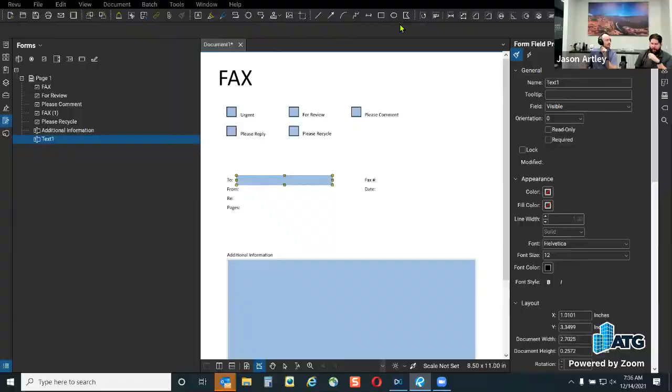Question here from Rob: they've shifted over 100% to Bluebeam from Acrobat. Everything's great, except for fill and sign on Adobe, which is really good for signing contracts. I know how to sign docs with Bluebeam with a password, but is there a similar fill and sign function? Because it's really slick on Acrobat.

So the question back to you, Rob, is what version of Revu do you have? Because if you have Revu Extreme, you can do more fill-sign stuff across multiple documents at the same time. I'm guessing Adobe works almost like DocuSign, where you click it and it drops you down to the next signature area. Is that what he's talking about?

Maybe, that's pretty slick. Yeah, because that's slick, I do like that. I know DocuSign has that. Revu doesn't have anything like that so far. What Revu does have is batch sign and seal, which is signing and sealing in the same location.

We actually did that last week. It looks like someone put that in the chat. Yeah, 20 Extreme. Okay, so what you could do -- it's not going to let you if there's already a place for you to sign and they placed that signature, this isn't going to help you that much.

But what this will help you with is if you don't have a signature, just a line where you're supposed to sign, great, because this will help you with that. If you already have the signed spots in place, this isn't going to help you because you're going to have to go through and click anyways, since Revu encrypts per page.

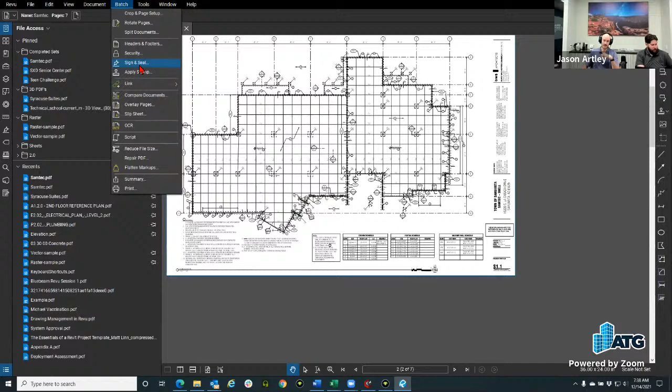What I'm going to do is go to batch, and from batch go to sign and seal. If you have Revu Extreme, because this is a Revu Extreme feature only, this is what you're going to go through and do. From here I'm going to try a different thing from signatures.

I'm wondering if you could click through and do it for signatures the other way. So from here we're going to do batch, sign, and seal. I'm going to hit next. You're going to be brought to this window, which will allow you to apply digital signatures here.

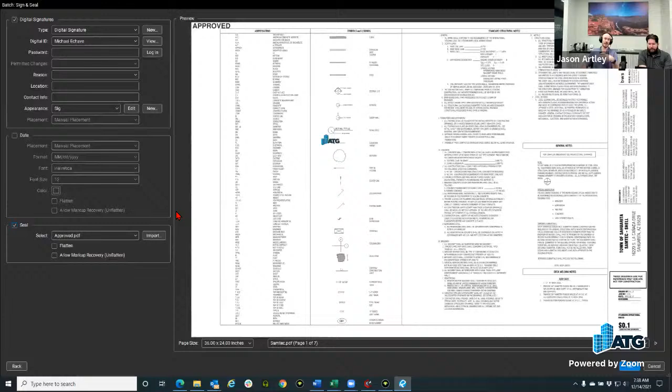This is going to be your sign-in signature, whatever you have. I have my signed signature here, which is just my ATG logo. And then I'm going to have my seal here -- you may not be providing the seal, you may be providing just the signature. So if you just wanted the signature in the same spot on the PDF, same location, this is what you're going to do.

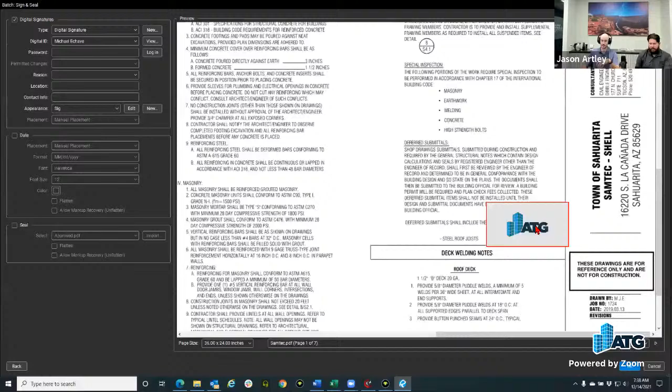Now, my other thought was, what happens if there are signature locations? So hold on, let me go to tools, apply signature location here. And then do -- so that's now a place. Let me go to the next page and add a new place to sign.

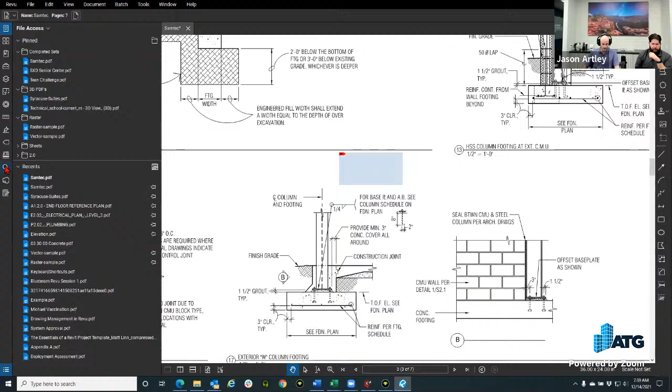Because what you'll have is, now from here, if I go to signatures -- it's not even showing the boxes in here. I guess it's only when you sign it. So maybe under forms -- where's my forms tab?

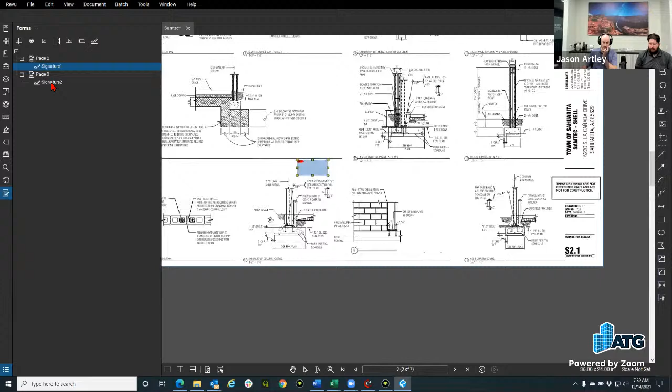So you can go to here and click on them, but it's not going to automatically sign all of them at once. And I think that's kind of where you're going with that.

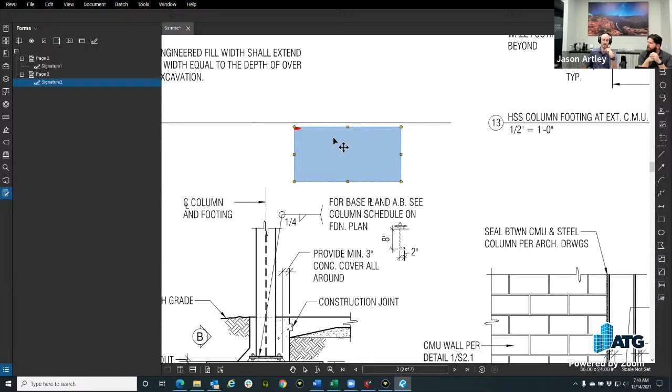So option A: delete the signature fields and then do the batch sign and seal, right? Or add hyperlinks to jump you to the next spot. Or flags. Or you can click these too from your forms -- that's a great way to do it.

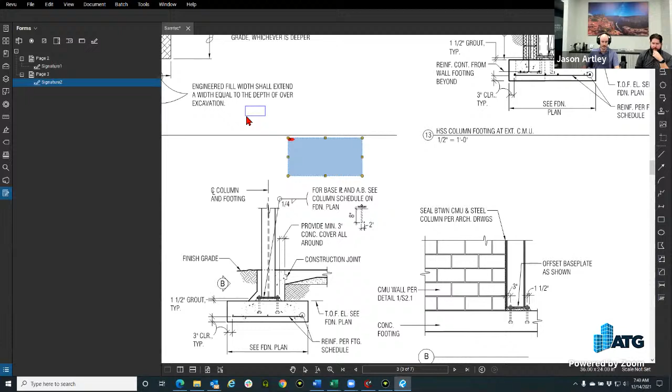But I think specific versions don't have the forms panel, if I'm correct. Yours being Extreme will. We have Extreme and you get the forms panel. This lets you click to each one and then sign them. Then you can come into here and just click, select, sign. You've already signed in, you get to sign it. But it's encrypting them per page.

Okay. Hopefully that answers your question. Interesting, good question.

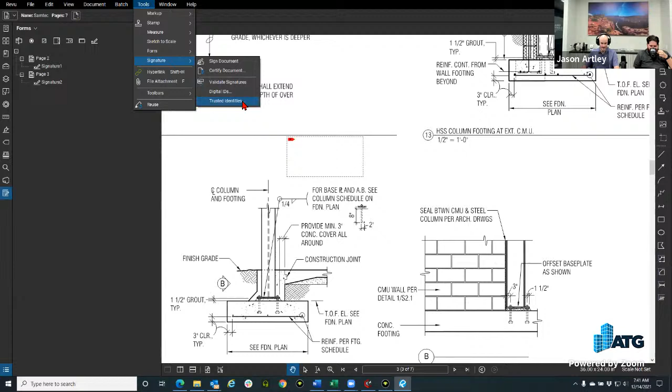So with that... unless, oh, are we going down the rabbit hole? You know I love to do it. I'm looking, there isn't any sign of it here. So yeah, okay, that'd be cool. Right, Doug? I'm glad some of you like going down the rabbit hole with us, because it's always fun, right? That's how we figure things out, and it's always fun with a sounding board.

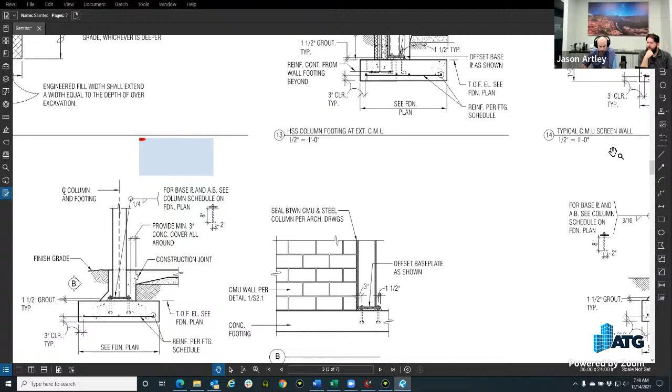Now, down here in the markups list, you have the ability to, like Jason was mentioning earlier, reorganize your columns, right? So as we go through and look at all of our columns here, I have some columns created already. And ironically enough, I have a formula-based column here.

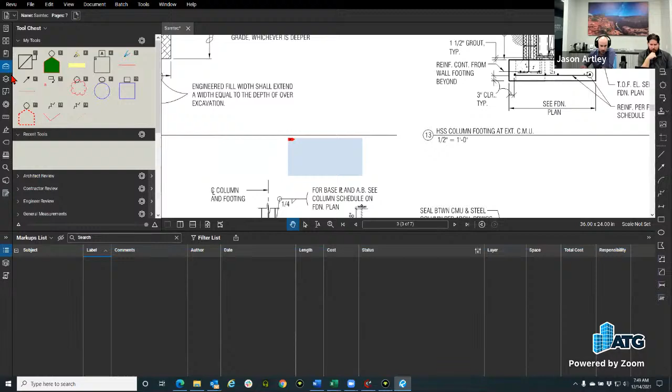So when I go through and make a markup, I'm going to grab a tool chest. Now, this was specific to an electrical design set that I had and was talking with the client. Yes, this is a structural design set, but what I'm going to do is place a line volt here that is a 120 volt.

It is a measurement feature here. I'm going to hold shift. It's actually a poly length. I need to apply a scale, and this is 3/32nds.

Now what I'm having here is some data being populated. So already with this custom markup, it's on a layer. I like having custom tool sets on a layer so that I can turn specific markups off that are set to a tool set. Number two, I have a cost value already associated to the markup, which you can do by creating a custom column that's not formula based. It's just a custom column that has a numerical value assigned to it.

And then from there, I created a custom column that is formula based, which is total cost. And that's what we're going into, the formula portion of that. So from here, I have a total cost of my length of my 120 volt that I'm going to be installing in this building that I have here.

Now how do I go about doing that? You can go to the markups list right here. There's the drop down, you have columns. Then the over button, you can go down to manage columns, because these are all out of the box here. I can go to manage columns, and then from here I have the custom columns window.

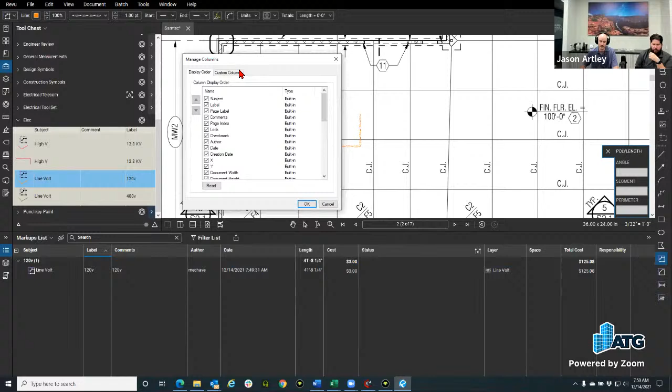So if I want to go through and create a custom column, two things: a custom column, once you've created it, stays with the PDF. If you wanted it to also stay with your profile, so if you open up your profile you see this, not the PDF, because the custom column will go away if you close the PDF. But if you want it to stay with the profile, like I had these already assigned to the profile, then I opened the PDF and it was already there. You're going to hit save to profile right here.

Now, how do I create a formula-based column? You're going to go to add, and then from here you get to name what type of column it's going to be. So for this instance, I did total cost down here. Next one is type, right? So you said formula.

Now, how does formula work? So you have these things called expressions, which, before you place your expression, it's going to be a column that's available, right? Because it's something by something, or this plus that, this times that, this divided by that.

So coming into here, I'm going to start typing what I want to do. So like for this instance, I had cost. So I wanted cost, I'm going to type in C, and it shows me all of my variables available for it. So from here I'm going to go down and say, hey, cost. And then what are you going to do? So I'm going to multiply, which is the star, times the length. As I type in L again, it's giving me my available columns to select from.

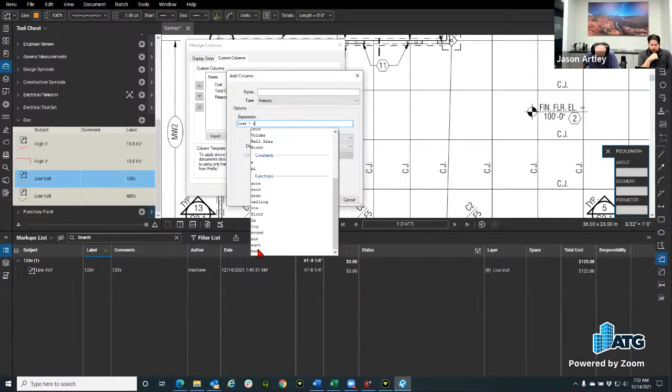It actually has functions here. If you go up, there was the length. I'm just looking, I haven't seen this functions portion here. So there's even a tangent. That's crazy. Okay, so there's even more functions that I wouldn't have thought of doing in here. Just be aware, again, something I learn new every day.

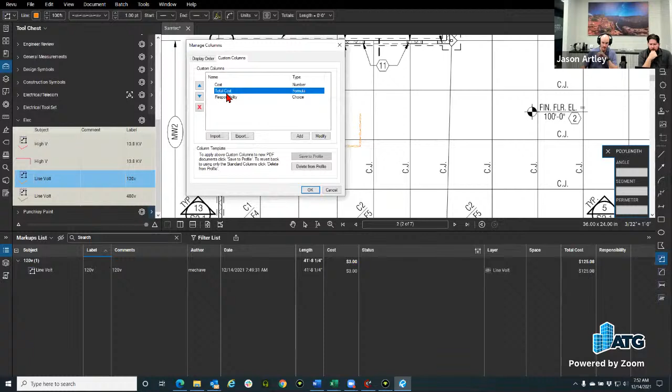Go to length, and that's going to be my item. So it's going to be cost times length. You just say what it is, and then it gives you that. I already have that one here, so I can go look at that one for total cost, modify, and that's exactly what I had, but the opposite direction. And then I gave it a format, because you can give it a numerical value. It's going to be currency for this specific one, and then 2 decimal places.

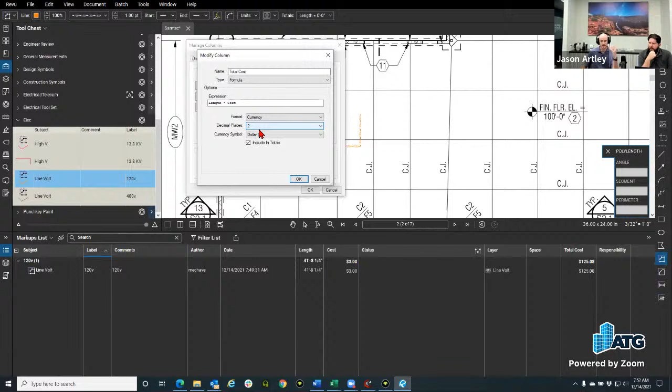Because is there anywhere that has past 2 decimal places? Not for money. Okay, so I don't know why. Well, I think I have seen 3 decimal places in some euro. Okay, well anyways, 2 decimal places here, currency value, you have some additional different ones. Is there more? Gosh, I'm so blind.

Euro, okay, krona, pull that count again. So there's a dollar, there's euro, the krona, the pound, the won, and the yen. Look at that. And then including totals, this is a big one.

If you don't include totals, they're not going to add all of them up. So if you're just working with the 120 volts, for instance, and you wanted to have the total of your 120 volt line, you're going to want to know the totals probably. You don't have to, you can manually add them yourselves. But again, it's completely up to you.

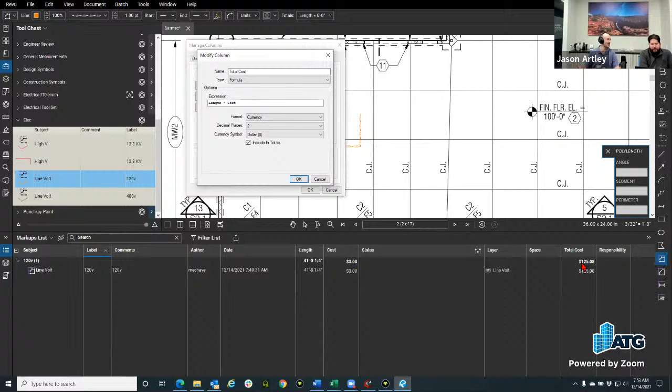So yeah, those formula functions, the only thing I don't like about that is there's no, when that drop down, you had all of the different variables and some of those sine, cosine stuff, but there wasn't an add or subtract. So you have to know to use the asterisk, the forward slash for divide, and then plus and minus. Yep, so you have to know those features. It works - if you know Excel formulas, it works pretty similar.

We did do a pretty good episode about this a few months ago. It should be labeled on YouTube, where we went into Excel to calculate wall area and how much it would cost to paint a wall. Yes, so we got pretty in depth with that, thanks to help from the community for helping us with Excel. There was a comment in the survey that we should learn more about Excel, which we haven't had time yet to, but we hope to in the future learn more in terms of Excel formulas.

About that, I did sign up for a global e-training course. Ooh, so Jason is tackling it first. Again, we listen to your comments. So if you say, hey, Mike and Jason need to learn this, we'll try to when we have time, of course, and we'll go through and try to tackle those.

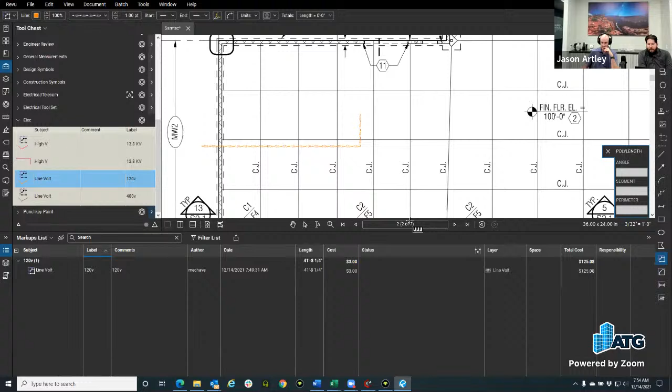Okay, so that was the first survey, those are the only questions from last week. The next one is about JavaScripting - we're not professionals in JavaScripting yet, and that'll be your job. Yes, right? Correct. Oh, so a question here from Christy.

Pretty new, I'm wondering if I can calculate flooring for takeoff, such as tile. So this is a perfect segue from the custom columns. You can absolutely calculate flooring for takeoffs, such as tile or carpet or hardwood or whatever you want. I'm opening up a document for you as you talk through it. So Michael's opening up a document to show you just this. If you want to play along, you're welcome to do so.

This is one of my favorite things to show off, because not only is flooring a valid thing, or landscaping or gravel or whatever you're going to do for the civil folks like me, you can change your materials - carpet, tile, hardwood, whatever. And then using that formula that Michael just showed, we can take that area or even volume and apply it towards a cost. And if we have extreme, we could put that into Excel.

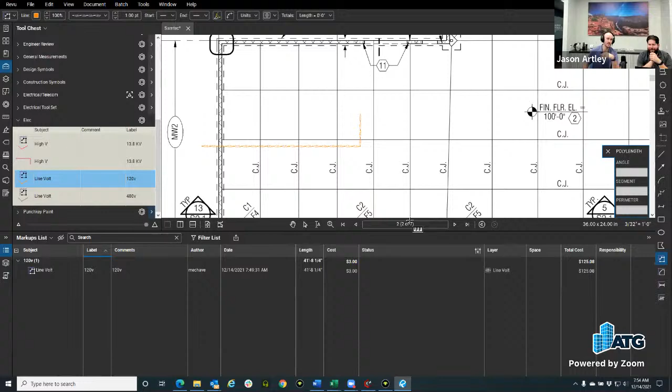That's right. Sorry, yes, I'm getting close. So all the comments of me getting close to my thing, so I can actually see the screen.

Okay, so we're in Revu here. I have a plan set open. I already have a profile created that has custom tool sets. So what you always want to do when you're creating any type of bidding, you probably want to create custom tool sets that have data already associated to it. So if you're new to Revu, I highly recommend going and watching one of our custom tool sets videos that we've done in the Morning Coffee Revu.

Again, they're about an hour long - you can fast forward, you can watch 2 times the speed, whatever you need to do to kind of speed that along, feel free to. But as we go through here, I'm going to show you from my tool sets on the left-hand side, if I see my tool chest, which I don't. Is it hiding? Or do I just can't see it? No, it's not - here is it below. Where is it? Did it go on the other side?

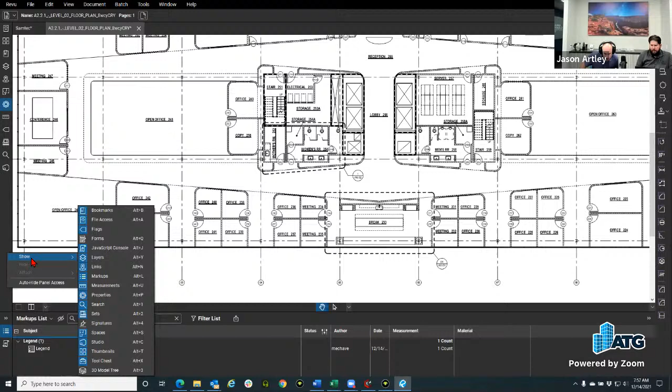Tool chest, it's there, at the bottom. Alt X, there we go. Okay, so from here I have my tool chest available.

And what I can do is I'll see that I have this thing called Punchkey Flooring. Now, if I change this from the gear symbol to detail, I have some changing of what the data is for it.

Hey Mike, can I rearrange these columns? You cannot, unfortunately, because now I have to pull this all the way out to see the label. If you're ever wanting to suggest things to Bluebeam, the more suggestions they get, the more likely this would be a great thing. Make a suggestion, it's under help, make suggestion.

Okay, so from here I went and made my area takeoffs have the subject name of flooring. Why? Because I'm gonna have the custom columns that are gonna pull out my data.

And again, everything can be done natively in Revu. It does not need to be done elsewhere, but it's completely up to you if you want to bring it out to Excel. If you have Extreme, you can have the live formula data, which I'll show next, populate into Excel. We did a whole Morning Coffee Revu on that, so I'm just going to show, I'm not going to elaborate today.

Then you have the label of what it is. So what am I going to be placing? I tied the label to that specific one. So let's go, for instance, the carpet is the first markup that we're going to go in and place.

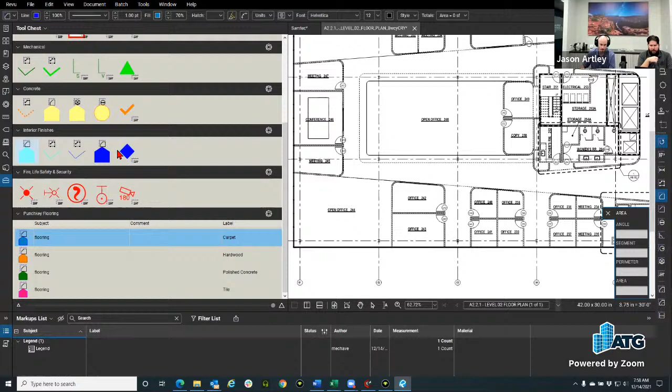Now I'm going to go down. I already calibrated this document to what the scale is. So the bottom right, I have my scale here, and I can just go through and click through points and drop my carpet placement. So over here, I have my custom columns already created in this specific document.

So the PDF is hosting the data for this instance, not the profile. But what I have here is my flooring takeoffs. I have the label of carpet, and then I also have the measurement, so it's 96 square feet, 96 and some change.

What's the total material cost? The cost of the material. I don't have a total column. Now we can go through and create that. But the reason why I don't have a total column here is because I use this as the Excel link.

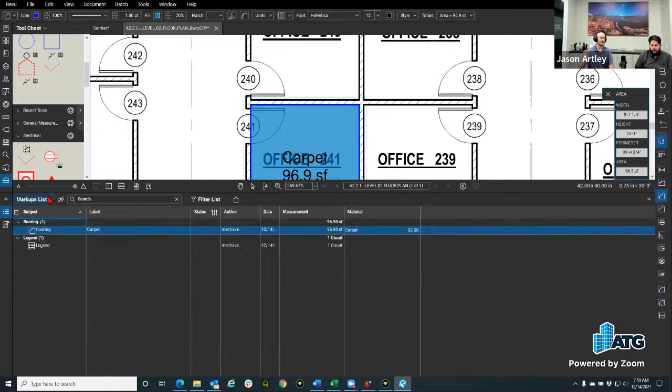So I have the live data into Excel already open, and now that's being populated here. That was a neat trick, you already had that queued up and I didn't even see you do it. Yes, so my data isn't totaled in Revu, but I showed you that earlier, how you could do that. This one is being totaled in Excel through quantity link, which is only a Revu Extreme feature.

Side note about columns, since we're still talking about it, custom columns cannot be done in a studio session. So make sure it's part of your PDF prior to uploading it to a studio session. Good question, Christy, I hope that helps you on your new journey to Revu.

Yes, and we will be at some point, right, in the near future. We'll give you a little hint, talking about limitations in studio.

Follow-up question: the flooring was cool, can you place seam lines? Of course you can. Oh, like a hatch. Use a hatch. Oh, okay.

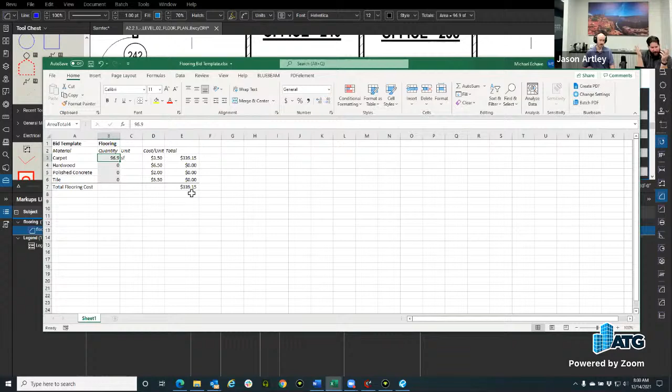So go back to your fancy little carpet there. Actually, make it tile, you have that capability. Is that one tile? Yeah.

So you can customize this. Oh, look at that, well that's hardwood. Oops, should probably bring this out. Tiles right here, I don't know what pink I used for tile.

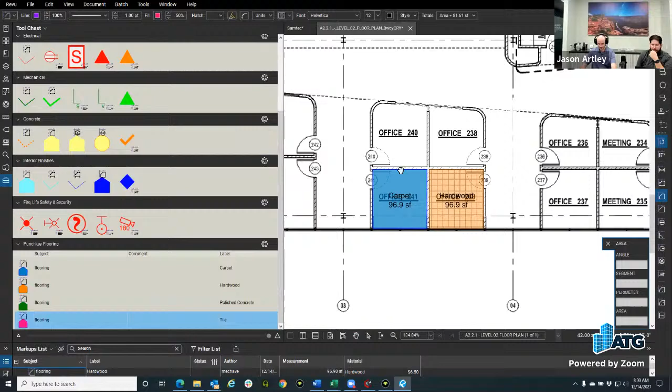There you go, so you can use whatever hatch. And if you really wanted to be careful or picky about it, you could have the different dimensions of tile, 6-inch tile, 4-inch tile.

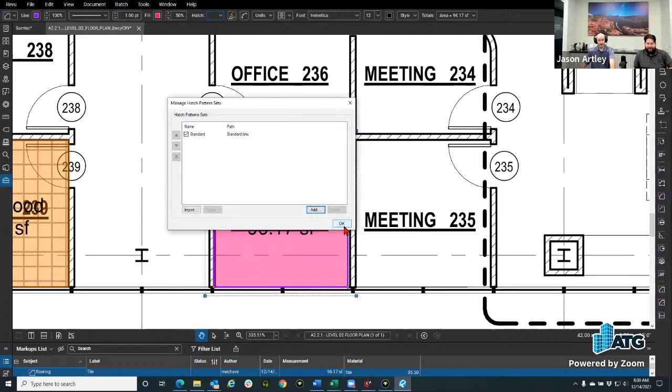I was going to name brands or materials, but I really don't know. And you can create your own hatch pattern, by the way. So save that for a future topic, we've never done that. Okay, that'd be a good one. But you can, so from here you do have the ability to change it, but there's one for hardwood.

So like you were saying, like your cross pattern, right? Is that what she was saying? Okay, yeah, you can include grout lines visibly by changing that hatch pattern. Good question.

Now, if you really wanted to be crazy about it, you could draw lines for your grout and then figure out how much grout you're going to need. But that's a whole other story.

All right, I have another question here from Rob. Can you create your own keyboard shortcuts? I guess you can, yes. So the letter keys, or can you edit existing ones? So first, where do you find where they are currently? Going too quick.

So it's up in the top left of the menu of Revu. This is the same place where you find profiles, but you have the keyboard shortcuts. You select it, and then from here you now have your options of existing ones.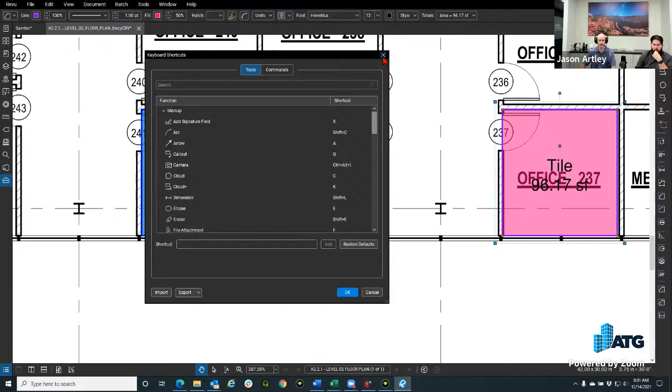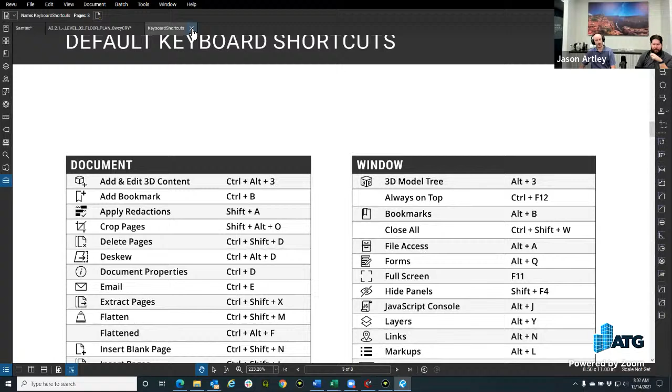I don't like to look at existing ones here. There's a nice PDF of it in the help section, and whenever I show folks this, please do not print it out. It's the whole point of Revu, it's always going to live here. It's keyboard shortcuts lists, they're here, and they also will show up where they are defaulted under here.

This is also where you can reassign. So it's one of two things, you can reassign ones that aren't existing, but this is also where you can look up like Shift Alt A. If I were to assign it to my fancy mouse that has like 10 different buttons on it, I would just need to know what the shortcut is and then tie it to my Logitech area, not here. So I'd go to my Logitech hub, and then this is where I'd assign it to my mouse.

Right, because then I know that's Alt, whatever the item was, and then I assign that specific... oh come on, skip intro, I know what this does. So from here I would assign it to like one of my side buttons, right? You got way more buttons than I do, and I hate this mouse, so maybe I'm going to upgrade.

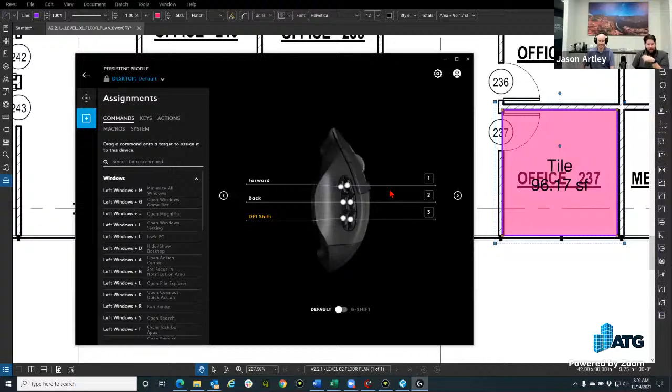So from this one, I could assign it to, I'd select in here and then type in what my command is, the Alt, was it Control Alt A? Shift Alt A? Something, it'll do all of that? That's pretty clever. So you would type in the command here, the keys for it on what's already existing.

I would just be wary of changing things that are already there, but I mean, to each their own, it's your environment, you do what you would like to do. But for you old school CAD users, this is a good tip, because now Line is L in Revu. It's also L in AutoCAD, so you can make them map.

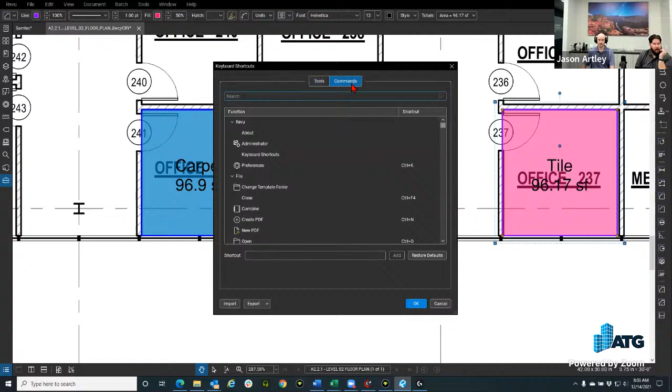If you are a keyboard hotkey type of person, you could totally customize it and become ninja level pretty quick. I mean, when I used to be in the design world, I used to just have my left hand sit right here and I would only use my mouse. So for me, I'd hardly ever go through and use the keyboard. But again, to each their own in their design environment and how they like to use their tools.

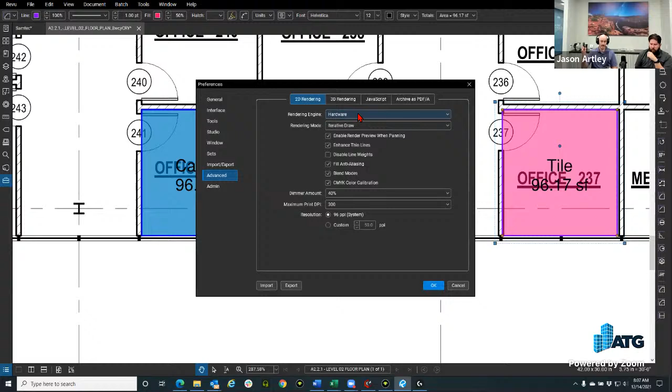If you are using a different type of laptop than what we have in terms of BIM boxes, something built for the industry, try this first. Otherwise it may be time for you to upgrade. And we're here to talk about that too, right?

Absolutely. Another question from Chris - can we use Bluebeam on a Microsoft Surface, for example? We've done episodes where my aging and failing Microsoft Surface is no longer happy running Bluebeam Revu, but that's like the 2015 version. The latest one I've been looking at getting would run Revu just fine - it's got more RAM. The one I have only has 4 gigs of RAM, that's not enough. I think you can get them up to 16 gigs of RAM now for the new Surface, that would run Revu really well. But it's not as good as the iPad.

Computing speed - the iPad has cheaper software and portability. We did a comparison, a couple of them actually, because my thoughts changed. I like the iPad for a lot of reasons, but Revu on the iPad isn't as good as the Windows version, which you could use on a Surface, but that's more expensive. So it's a loaded question - again, different tools for different jobs. In an ideal world, you'd have a BIM box and an iPad, or a Surface and an iPad, or something.

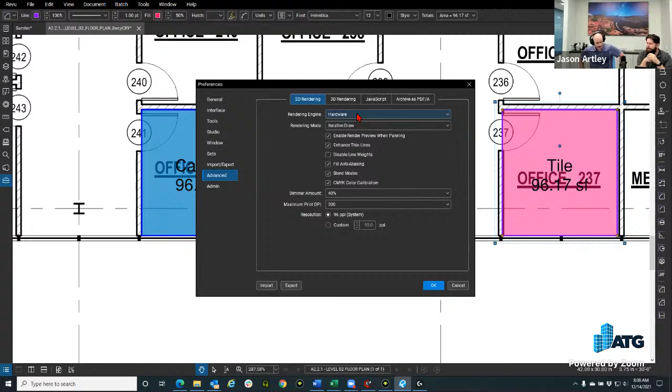More than one. And kind of coattailing on that - how would we get into this? So Revu on the iPad, you purchase the license through the App Store. Now if I'm going to use a Surface and I have a single license - this has been asked multiple times - how can I use one license on multiple devices? Like if I'm going to go out to the field to use my Surface, how can I use it? I always reference: read your license agreement.

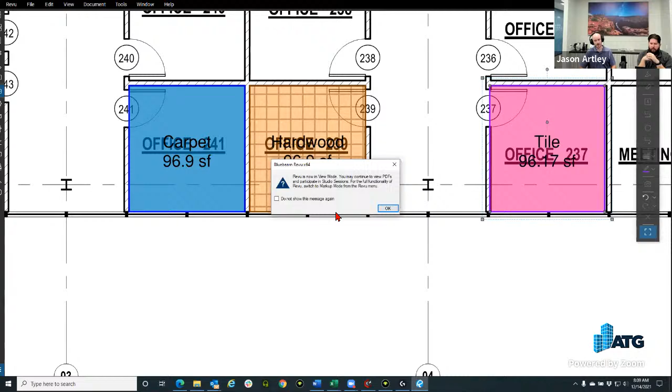But if you're doing this for yourself on your Surface Pro, what you're going to do is make sure you unregister - you can re-register and unregister a license of Revu on the desktop. So right here, you hit unregister and it turns into, I love when Jason says it, what type of mode? View mode.

So view mode is the free version of Revu. I recommend installing it on everyone's computer versus having other readers from other software. But you're still able to take dimensions - they don't stick, but they are accurate dimensions. So if someone just needed to verify something, you could still do that in the viewer mode of Revu, but this is a free version. Then when you're ready to re-register it, you only have to do this once. So if this is on your Surface, you have to re-enter your serial number and product key only once, because when you come back in to re-register it, it will have it all there.

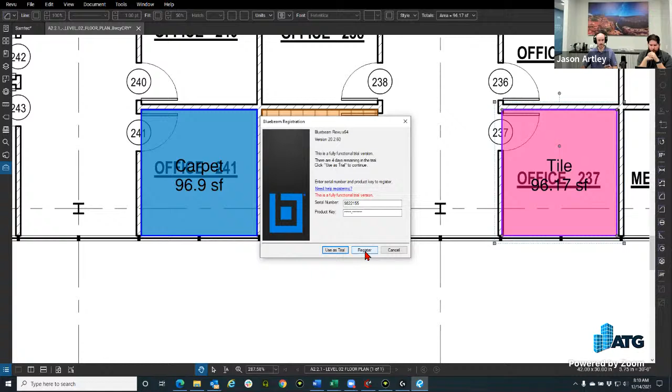And I just hit register. And now I'm back into the paid for version of Revu.

But that view mode will participate in a studio session. Yes, so if you were wanting to work on something from home, you could easily start a session with the full version at work and then use view mode at home and add markups. There's limitations to sessions, which we'll be covering in a future topic.

Good question. So another question, do you know how many cores Revu uses? I do not. I don't either. But be it that it runs okay on a Surface, probably just uses the single core. I will answer that question next week. I'll re-ask myself that question. I'll find out in a couple of minutes after we're done with today.

Any other questions in the chat? I don't see any currently. All right, okay, so let me go pause this again. So we talked about, because that was in the chat earlier, was the question about, yep, okay. I'm new to Revu. What would, is that one? Well, that's the question, it wasn't a question, it was a statement. Ooh, that's a good question.

We're stealing that one from Chris: making stamps with checkboxes. Yes, but that's the JavaScripting behind it with the checkbox. But there's a cheat solution, where we can go download a stamp that already has it and then edit it. And we showed that, right? Yeah, we talked about that last week.

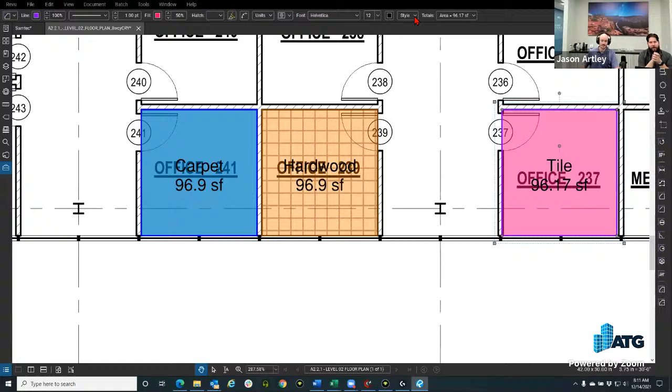Tool sets, profiles, smart tools and tool sets, line style creation. Ooh, line style, that's one. Let's do that one, I like that one. That's always a fun topic, especially for us CAD folks. If you've ever created line types in AutoCAD using Notepad, of all things, you'll lose your mind. I know I have met people who love and thrive on that, but it's not me. And I've done it for many, many hours of my life.

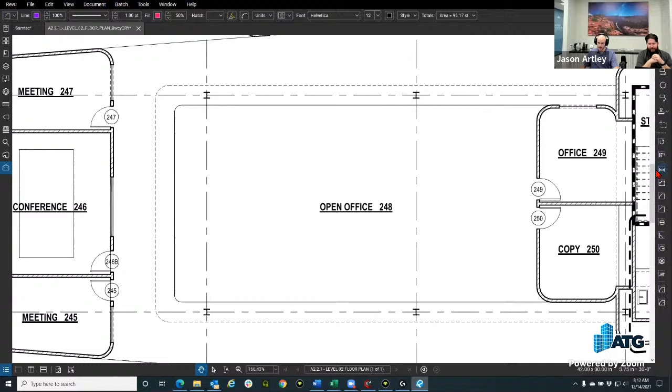Thankfully, there's a tool from CTC that makes that easier for AutoCAD use. But here in Bluebeam Revu, you're going to see some really cool stuff. So we're still on my computer. If we want to go through and create a custom line style here, I've actually done it for the 20 volt I was showing earlier, but let me go through and just go to tools, markups. I'm going to use the line command. Hotkey to make sure I'm having straight orthogonal positioning is shift, and then I'm going to place it here. Okay, so here's my line. Let's make it a little longer. Shift again, so now I'm here and getting ready to change this.

I have what's called the options bar, also referred to as the options bar in Revit. Revit has a similar thing for what the properties of things are being changed. What I like to call it is the dynamic options bar - why? Because it's dynamic to whatever command you're in, meaning things change for the settings that you're going to be shown. So if we're going to tie it to Autodesk terminology, then it would be the contextual dynamic bar, because it shows up in context to what you have selected. Yes, and again, dynamic being the context part, right?

Okay, so as we see here, these are out of the box, and you're probably like, hey Mike, I only have all the way down to -6. This is the advanced lines that you get to download. And if you're ever wondering, if you don't have them, just message us. I sent a link out one time before to a client because they're like, hey, I didn't have these. Mine all will show up - I've never downloaded anything. I think maybe it's the extreme, or maybe it's just in the advanced profile. I don't know, we'll find out. Go back to Revu - well, I'm in the Revu profile right here, but I think it's saved through all. As we go through here, you can see some have been created. I didn't create any in this one, but we're going to go through and create some ourselves.

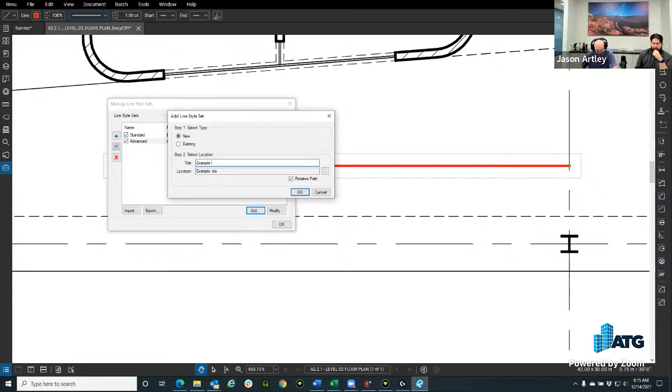Hit OK. Now these are going to be the new sets of the global category of those, right? Because we had the advanced and they had all those weird ones. Same thing, example, and then some new ones are going to create.

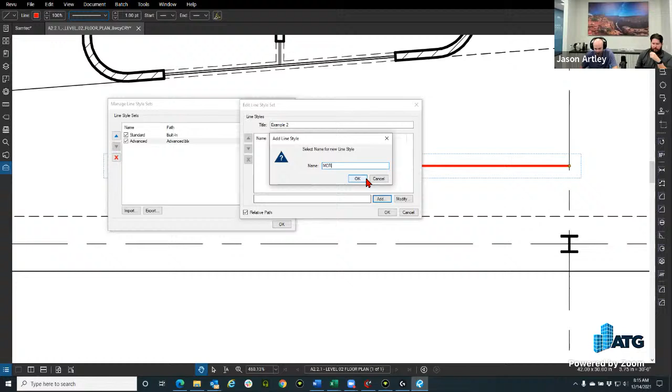So I'm going to add a new one. What am I going to name it? MCR, Morning Coffee Review. And this is the editor.

This is the golden child where you were like in pain in AutoCAD days. Why didn't they just create this? So whoever developed this, bravo. Yes, seriously, anyone on that Bluebeam development team, you are a genius, because this is the line, right?

So this number 1 up here is what it's going to be, example of here. It's just a line currently. So from here, I can either remove that line or add an additional line. See, now I have 2 lines. Or if I don't want it to be a line, I'm going to delete this one line and then have this line, maybe a 0 offset here.

Now, if I'm going to have this as the center, I want to modify the way this line looks, because I'm going to have dash MCR dash is my thought. I think that's good, okay. So I'm going to have this line have dash MCR dash.

Now I've selected the line and I want to add things to the line. That's what you do down here. You can add more lines or more things that you're going to modify from the lines up here, but I want 1 line with modifications to that. So I'm going to add a modification to that. You have options like dash, space, dot, text, and vector. So I'm going to do dash first, hit OK.

So now it's first a dash, and I'm going to add another one, and it's going to be text. So vector is pretty cool. Let me just show this, because I've done it before, and it's drawing what you want. So if you want to get fancy, here's some grid paper and draw what you want to draw.

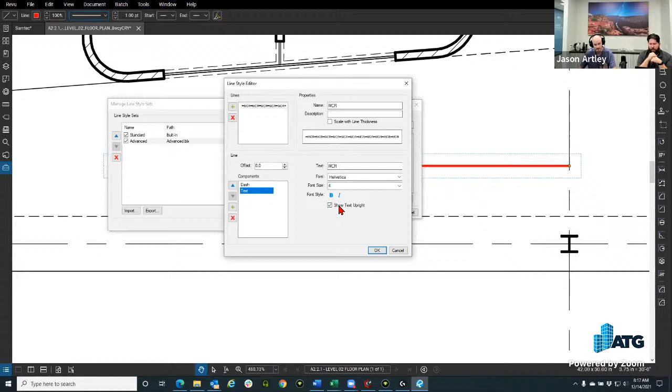So the dash width is 3. We can make it longer, shorter, whatever we want. And then our text is going to be MCR. So we have dash, MCR, dash, and continue onward. But again, all of these are set up for that. So this is good, this is what I wanted. I'm going to hit OK.

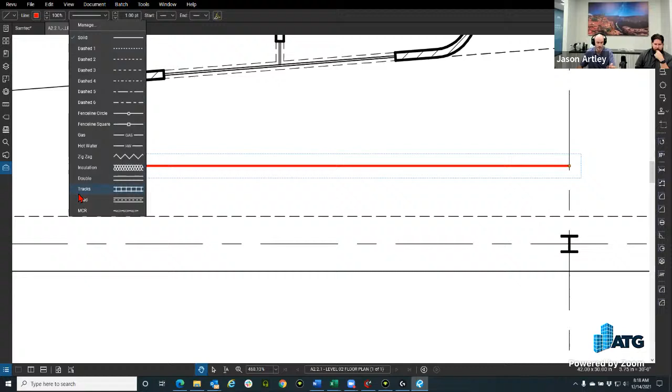And again, you can keep adding newer ones here, right? And they'll populate under this example portion here. Hit OK, hit OK. And then I can come back up here, and it would be nice if they had like a header, these are your advanced, these are your, but it's not, that's fine. Just know that this is in its own category. And I can say, there we go, there's my MCR. So there's my line. So let's back this up a little bit.

You can create a set for your company, right? So maybe you work at a landscape firm. You can have Jane's landscaping company have a set, and then you would have ones for your different borders and irrigation and all this other stuff.

You've probably realized by now that just about everything in Bluebeam Revu is importable and exportable. So create your company standard line set, export it, and share it with your team. They can all import it and use the same stuff. As easy as it is to make line styles, it's even easier to share them.

It's one of those things where if someone has the bug to go create custom things, great—let them go create whatever they need to, and then they can send them all out. Or you can draw straws. I'm one of those creative creatures, so I'd love to do that. Or if you don't have one of those, you can draw straws and share it, or split it up. However you want to do it, just be aware not everything—most things are exportable in Revu.

That's true. So speaking of creative minds, let's go back to that line style and add that vector, because there's a question here from Marvin: what does that blue shading represent in that vector box? So we'll go back to modify, modify the MCR, and add a vector component.

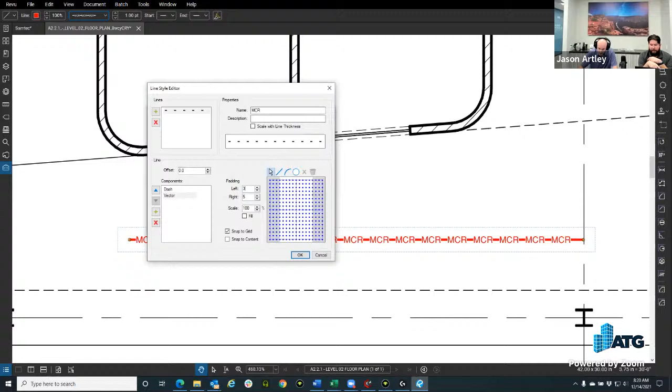I'm writing over this line that was originally the dash. So within your zone, this is writing over to the next portion of your line. So if you reduce the left padding—oops, hit escape. So if you change your left padding from 5 to 3, right there, that should affect the gray box, maybe.

Yeah, so—oh, it actually made it bigger. Oops, I keep hitting escape. Don't hit escape, that's like—there we go, see, I can slap your hand. Yeah, we got to do this in person more often. You help me all the time. It's one of my downfalls, I always hit escape to get out of something. So if I just—he's like, just put your hand off. That makes so much sense. Instead of just not doing it, my hand's gone and now I can't do it.

CAD users—so from here, I went to 3 on the left, so it's backwards is what it is. But it added 3 to that original 5. It got bigger, which is... maybe it's the zone from here to here, so it's 5, so 3 dots. Oh yeah, from the center, that's what it is. Okay, so my line from here to here, but again, it's overriding that new indication of where it is. So this from here to here is your space. That's what it is—the other side is like the other object over there.

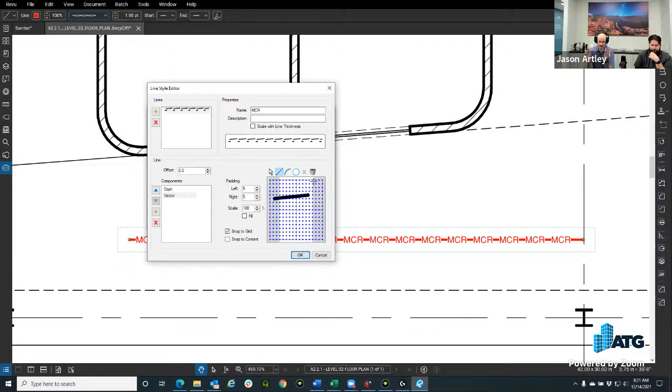Okay, so the shading is a little weird in the vector design. Thanks for that question, Marvin, because this is great for us to go experiment a bit.

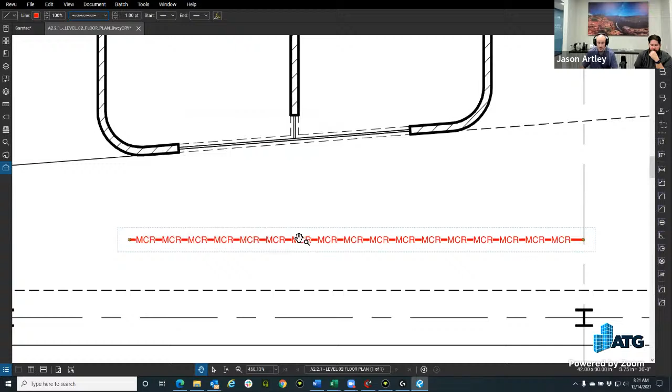And this, the center is obviously the below now, so you have the top and below of that line. Hit OK, hit OK, hit OK. And I do know this is true because I've done this before: it does not change the line that's already there. That's what I was going to highlight there, because that's a big thing, right? That's what I would have to do. That's very abstract, kind of abstract, yeah—my creativeness, there you go.

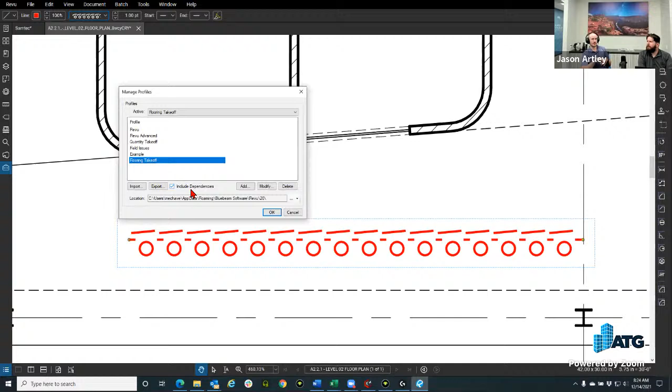Manage profiles here, and then if you select it, you have the option to include dependencies on export. These are seen as a .bpx, and that is your profile. Include dependencies means it's going to bring over your tool sets, columns, line types, preferences - probably all of that stuff, I would think. Yeah, columns, all that stuff comes over with that. So make sure that it's checked, because if it's not, you're not going to have everything.

So when you load that profile, we've talked about this before - make it read only on the Windows if you don't want people to change it. But if you do have it saved locally on your own drive, when they re-import it, it will say overwrite, so it could change all of their existing things if they modified it back to what the normal one was.

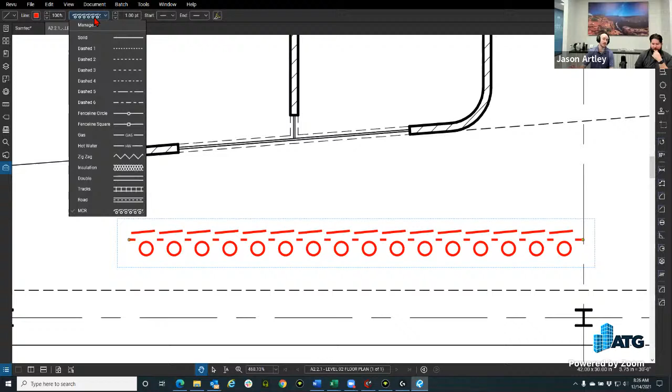Okay, so going back to here though, if you're just going to export out just the line styles, because I think that was the other question - if you go to manage, they're seen as... let me see, the BLX. Thank you, because I can barely see. BLX - that's why I have a larger screen at home, not this 15-inch.

And you will then be able to export that here and import it. But most file extensions from Bluebeam, when you double click on them, it opens Bluebeam and imports them. So on most of them, you don't even need to open the software - you can double click on it and it opens it up. I've never tried that because I'm pretty much an anti-double clicker.

Yes, Autodesk products die hard. With Revu products or Bluebeam products, you can double click on the extension wherever it is saved, and it will, majority of the times - I know it's for BPX, probably this one too - you double click and it loads it in. This is also a good thing you could do as a file attachment: take that BLX file, attach it to your PDF in a session, and share it with everybody. Yep, and it's the same thing for tool sets.

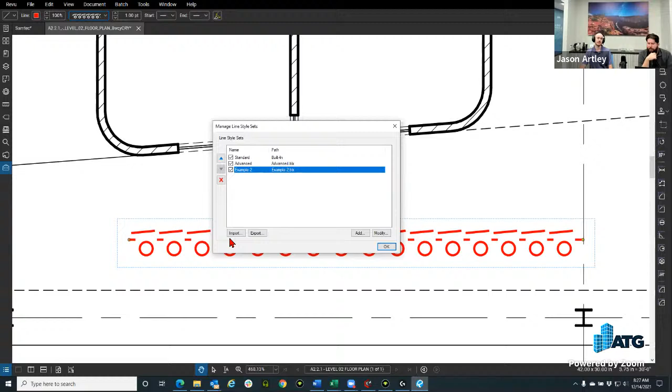I know you can double click on those because I've done that all the time as well. It populates Revu, opens, saves them. You can close out of Revu. Just be aware when you do that, it's already defaulted to the profile you're actively in, if you're just doing the tool sets.

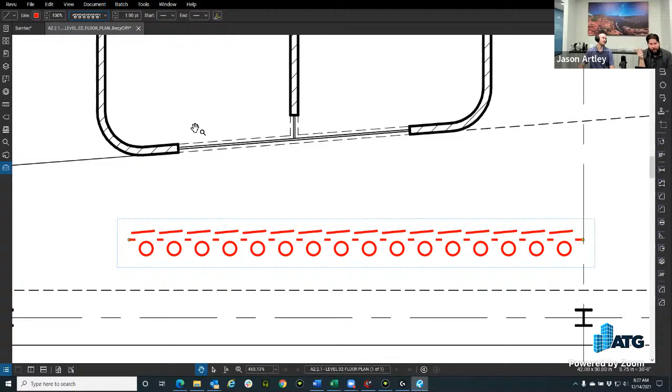It's also a good trick for getting custom line types on an iPad, because that's really hard to do otherwise. So if you attach your BLX file to a PDF and then have that PDF open in an iPad session, it should add those line types.

Well, how do I attach it? You go up to Tools, File Attachment, or hit F for the hotkey. Yes, and most folks don't have this window populated. I do because I enabled it from preferences.

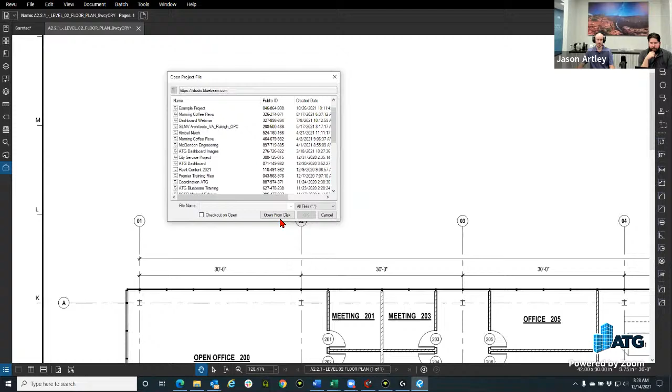This is for when you're creating dashboards, trying to pull information or files or folders out from projects. So I open from disk, and this is usually what you'll see here. From here, you can go into, let's go to here. And then we can go, well actually, I think I have desktop, I have profiles. Is it going to be tool sets?

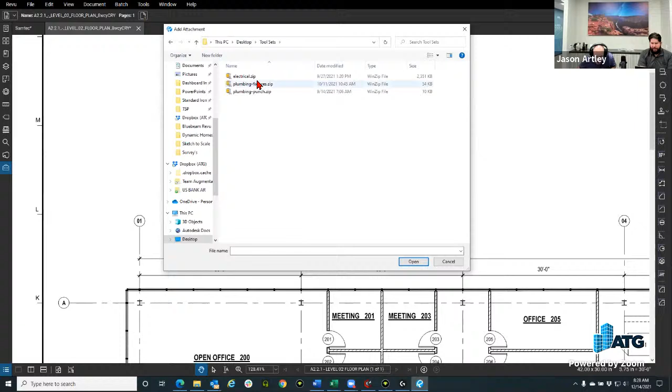There you go. So from here, all these are all zips, but I guess you can put a zip in here too. Yeah, absolutely. So from here, you'll have the icon. I prefer to change this to what it is, so then they can see it. And then this is going to zip. I have WinZip, and it's going to say you don't own it, so I'm not going to double click it. I was like, that logo looks familiar, but it's been a while.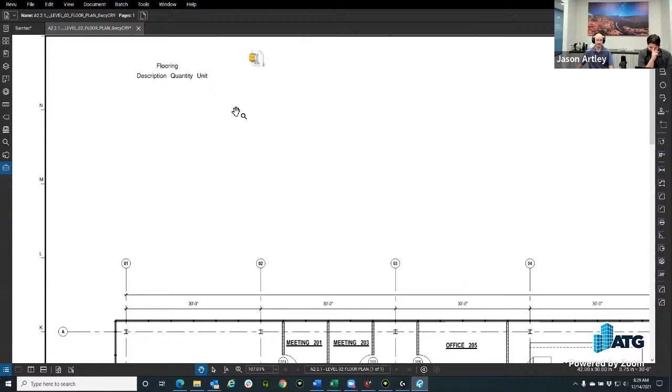And then you can double click them for action items. You can even attach an Excel file from here if you wanted to, onto the PDF. And then when you send the PDF, they'll have the Excel file. They can double click it, it opens up. Or pictures or Word documents or specs. There's all types of good uses for the file attachment.

File attachments do not follow when you flatten your documents though, so be careful.

All right, we got about a minute left. Are these all answered? Okay. Yep. So Marvin sharing his story.

They added files to a Bluebeam Studio project and then added them right to the iPad. Ooh, smart. Great tip. Because then you didn't have to send anything, it's on the file. Smart.

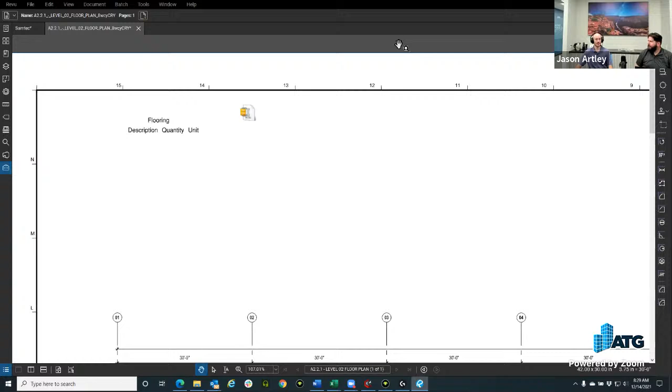Or if you ever do need to send a file and it's too large, you can create a studio project. Studio is free with any version of Revu. And what you do get access to, you have the ability to go down, and I'm going to open this project here. You can add a file to it, any file type, by the way, and you can send a shareable link. So let me not save that document that I marked up.

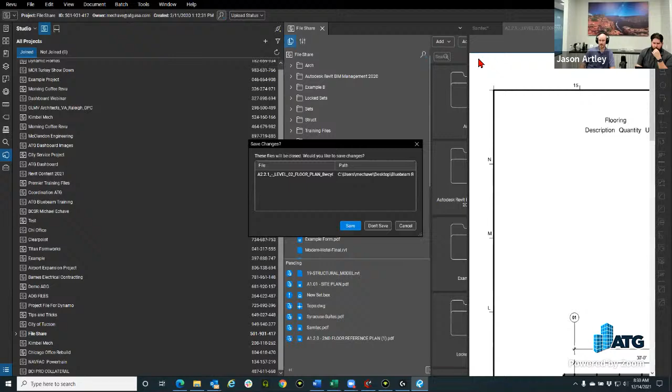So you'll be in your project here. You can add any document file type you want. I do know you cannot add an executable in here. I think that's the only limitation I've seen.

And you can right click on the PDF and you can say share link. This is a static link. It's not dynamic, it's not going to update if you update the document in here. But what you do get the ability to do is get a lovely little link here, and you can send that. And what does that look like when you... let's go.

Pretty slick way, so you don't need Dropbox, you don't have to pay for Dropbox anymore. Nope. Hallelujah. Yes. And then Google Drive, I mean Autodesk Drive is still pretty good, but yeah, if you're already using studio projects, this is a great tool to add to your arsenal.